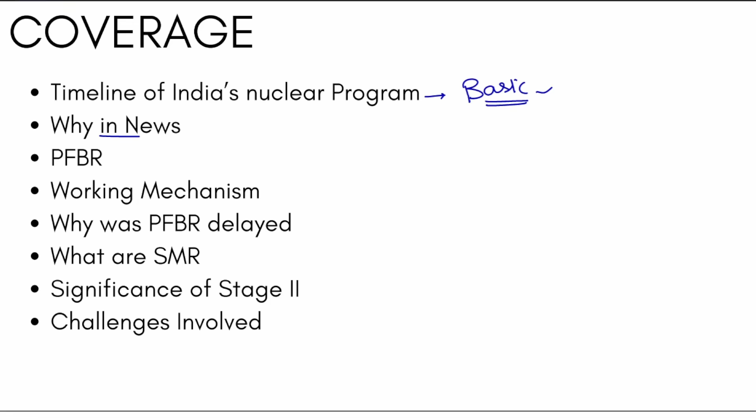So let's see a list of topics that we are going to cover. The first thing is the timeline of India's nuclear program from the very basics till now. Next, we'll focus on why is it in news now in 2024 and how is it important for our prelims? What can be asked? Furthermore, we'll see what are PFBR or prototype fast breeding reactors and what is the meaning of all these terms, fast breeding reactors and so on, how they differ from the pressurized heavy water reactors or the stage 1 reactors.

Next we see how do they work, the working mechanism of the PFBR and why was PFBR delayed till now. What happened in 1974 and 77? What happened in 2003? Which agreement was signed between India and US in 2005 and what is happening in 2024. What are the SMR, small modular reactors? We'll be talking about these also. What is the significance of the stage 2 for India and what are the challenges involved for the future development of India's nuclear program? All right, let's talk about this.

So in 1948, right after India's independence, India was very quick to hold on to the atomic energy development. The Atomic Energy Act was passed and the Department of Atomic Energy, that is DAE, was established. In 1954, a very renowned physicist, Dr. Homi Jahangir Bhabha, HJB, was made the first chairman of the DAE. So please remember, very, very important, first chairman of the DAE.

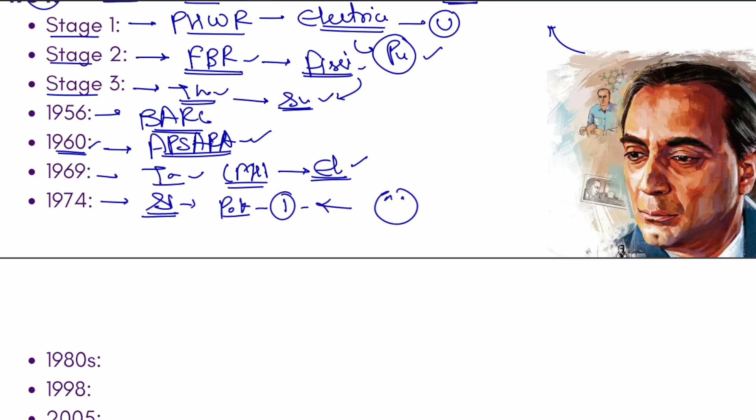In 1974, India conducts its first peaceful nuclear test, that is Smiling Buddha in Pokhran of Rajasthan, also known as Pokhran 1. This attracted sanctions from the West. They were not very happy with what India was doing in its backyard and implemented further sanctions. In the 1980s, India focused on the Indianization of the fuel. Uranium stopped coming from the West as well as from other countries, let's say France. This was critical for India's nuclear development, but it stopped coming. So India was not very happy with this.

So they had to use alternative fuels for the PHWRs. And in the 1980s, India focused on the Indianization of nuclear fuel cycle technologies and reactor designs. All right, in 1998, then what happens? Pokhran 2 was conducted. So India has shown the world that regardless of the sanctions and all, we are still strong and will not deter from our nuclear development program.

In 2005, India and US came to an agreement, also known as the 123 agreement, which paved the way for India's further development, and it ended most sanctions. In 2010, India continued to expand its nuclear power and refine its fast breeder reactor technology. We have been working on this FBR since 2003, and even earlier. All right, now let's talk about the present.

But first of all, let's have a look at India's current most important nuclear power plants. The first one is Rawatbhata in Rajasthan. This is near Kota, also very famous for the coaching centers. Then there is Narora in Uttar Pradesh, and Tarapur, the first one and the most famous. Then there is Kakrapar in Gujarat. And the one in news, that is Kalpakkam in Tamil Nadu. This is where the first PFBR core loading has happened. This is why it's in news.

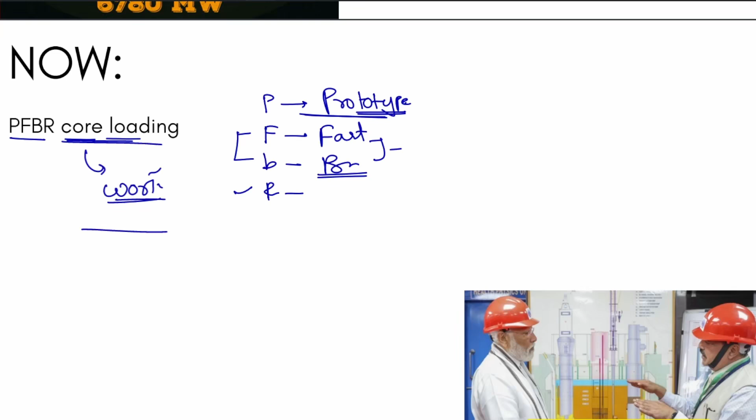Then there is F. F means fast. And B means breeder or breeding. And R means reactor. FB, we'll see later what happens to the neutrons, that's why it's known as fast breeding, and P is the first thing that has been developed. So this core loading has happened. Core loading basically means the fuel has been loaded into its core and it has started working, and this was witnessed by our Prime Minister Narendra Modi.

This marks the start of stage 2 of our nuclear development program, which was envisioned by Homi Jahangir Bhabha in 1954. After around 70 years, we are seeing this. So this has a closed fuel cycle. That means more nuclear fuel is not supposed to be supplied to this core. It uses the plutonium already produced by itself from different materials, from uranium oxide and a blanket material that we are not going to talk about right here.

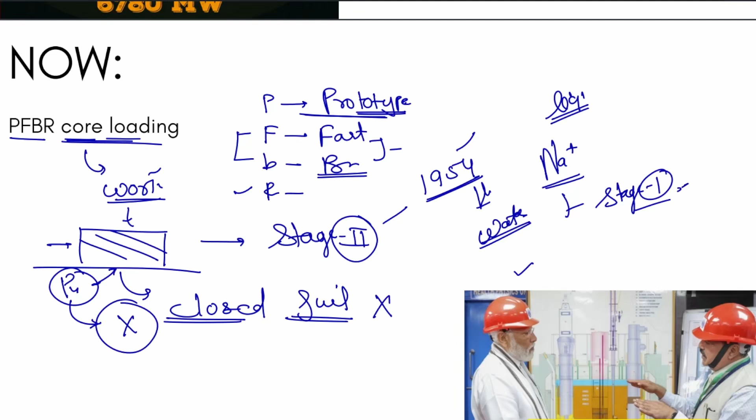Second, a unique feature of this PFBR is that it is cooled by liquid sodium, not by water or heavy water, unlike the stage 1 reactors. So it will help us in achieving self-reliance in the fuel supply for future fast reactors. This is a heavy water reactor, PHWR. So this is our stage 1 reactor.

So what we see here is the core of this reactor. These are the fuel assemblies. When we talk about the fuel assemblies, we essentially talk about uranium, so these are uranium rods here. These are the pressure channels which pressurize the water here. The neutrons react with this uranium and emit energy as well as various different things. Water is pressurized so that it does not boil. We'll talk about this as well.

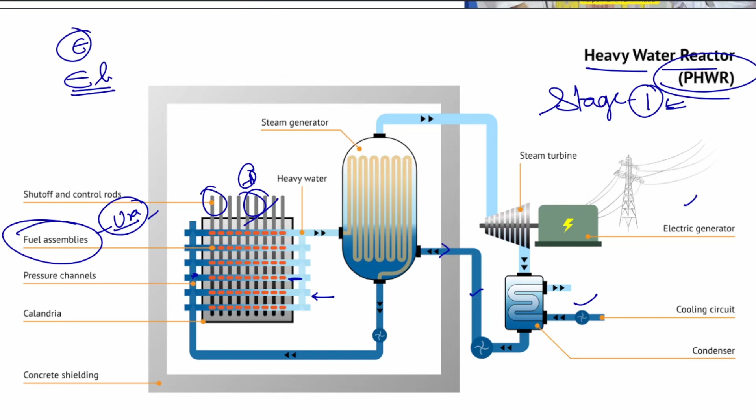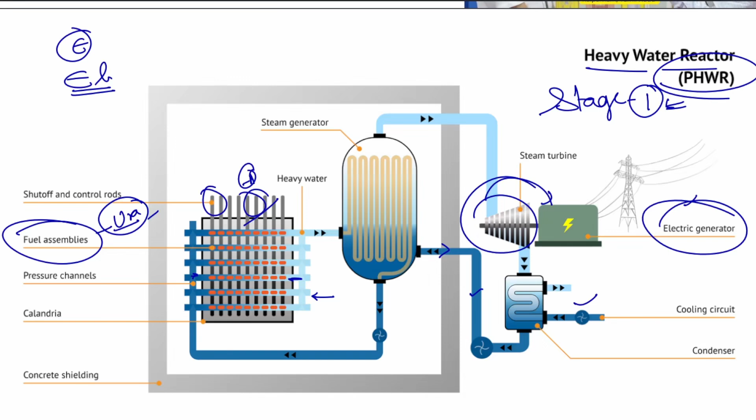This is the cooling circuit and electricity generator and so on. The energy that comes out heats this water, and this heated water moves a turbine here. This is the steam turbine, and electricity is generated. It basically works on the turbine method. So very simple. Next, we see the fuel that we are using.

I know it all looks a bit complicated, but we'll try to keep it as simple as possible. This is uranium 238, and this is the number of protons and neutrons it has in its nucleus. So basically we're learning about the structure of a simple atom.

It has some orbitals, and there we can find the electrons. Then it has a nucleus where we find the neutrons as well as the protons. The protons have a positive charge, neutrons have zero charge. This is why they are called neutrons, and electrons have a negative charge. The electrons have very small weight, but protons and neutrons have the same weight.

What happens when a nucleus is struck by an external neutron? It delivers some momentum to it. If the atom is unstable, then it will always break down into two counterparts. So this is what happens in a fission reaction. This releases energy, extra energy, and the opposite of this happens in a fusion reaction.

For a fusion reaction to take place, that means for different atoms to merge into each other, let's say deuterium and tritium, what we need is very high temperature and very high pressure. This often takes place at the core of the sun. We can observe this, and China is also making an artificial machine to do this. But we are not talking about fusion here. We are just talking about the fission reaction that is taking place in nuclear plants right now to produce electricity. The stage one nuclear reactions.

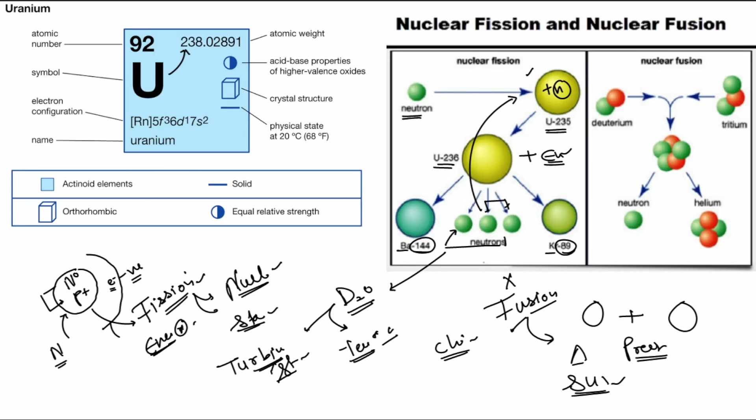So this can go on as a chain reaction if not controlled. This is why we use heavy water, D2O. This D2O slows down these neutrons, and D2O also absorbs the heat or energy that is produced, which is what drives the turbine via steam formation. Now let's talk about the pressurized part.

The water is pressurized because we do not want the water to boil. As we can see, the water is lying alongside the fuel rods, the uranium rods. A lot of energy is released here, and because this energy goes directly into water, the PHWR first stage reactors do not use direct steam. The steam is not directly produced by boiling because we do not want the water to boil inside the reactor itself. If the water starts boiling here, our reaction will not be completed, or it will go awry. It can lead to a disaster. We want the water to stay the same here.

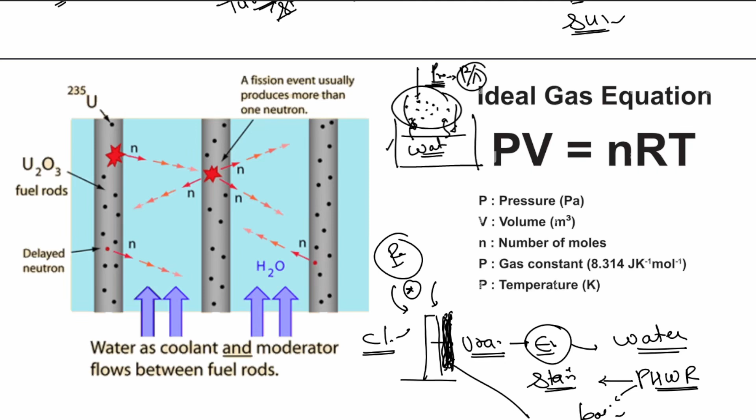So what we do is apply some external pressure. Let's say this is a container of water, and when we make it boil, it will change into water vapor, the gaseous phase. The distance between the water molecules will change; they will expand. So we apply some pressure, an external force. Pressure is equal to force upon area. We apply pressure here to keep them close and bound so that it does not boil. So now we have understood everything.

One more thing we need to understand is natural uranium. Natural uranium, whenever we get it as a fuel, has both parts, uranium 238 as well as uranium 235. We saw which one we used in the PHWR. In the PHWR, we use uranium 235 and it got consumed. So now we are left with uranium 238 as well as plutonium.

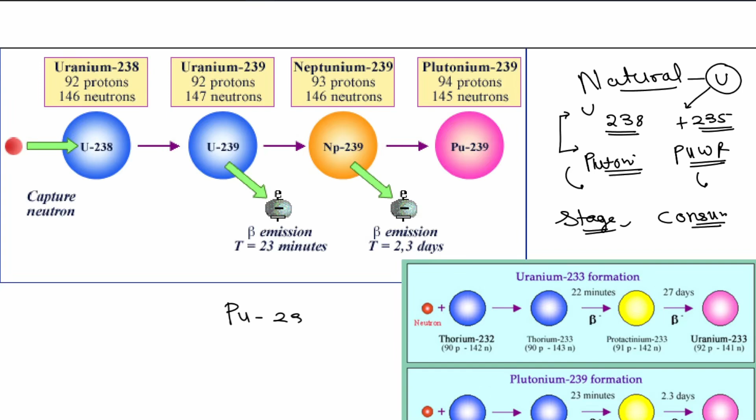Plutonium. So we must use these somewhere to do something or make us more energy somehow. This is the basic of our stage 2. In stage 2 we will be using Pu-239, that is plutonium 239, with uranium 238 in the PFBR. So we need a different reactor for this. That is our prototype fast breeder reactor, PFBR, to produce energy,

plus uranium 233. Again a new type, uranium 233, and more plutonium 239. Now as a basic premise, what we see is that this plutonium 239 can be used again in here. We will be needing uranium 238 to carry on the reaction. So it will be basically producing more plutonium than it consumes originally, and all of these are connected.

So for the establishment of this PFBR, the Indian government and the DAE set up a special purpose vehicle, or basically a research center. This is known as the Bharatiya Nabhikiya Vidyut Nigam Limited. Nabhikiya means nucleus, so relating to nucleus, to implement stage 2. This was established in the year 2003. So after 21 years, this technology has come into action.

Alright, in stage 3, what will we be doing? Plutonium 239, which we have here, will be combined with thorium 232, and this will produce uranium 233, which again we will use. Here's an infographic that tells us about the 3 stages and how they are connected to each other.

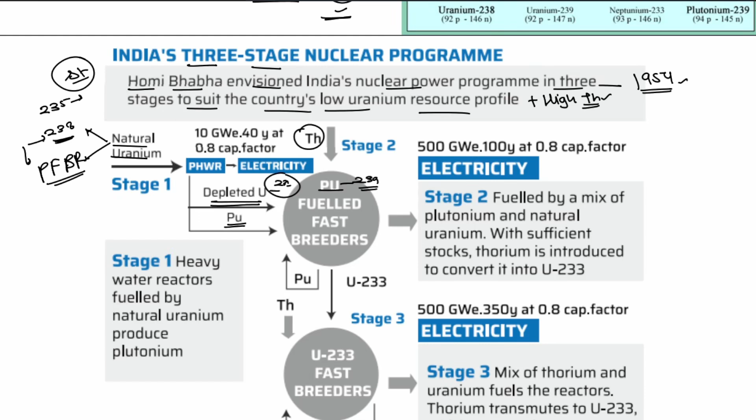Now we will introduce some thorium in stage 2 and use this plutonium 239 and the depleted uranium 238 in stage 2. So fueled by a mixture of plutonium and natural uranium, with sufficient stocks, thorium is introduced to convert it into U-233. So again some energy is released in stage 2 and we obtain U-233 further with the plutonium. The plutonium goes back into stage 2, and for this U-233 we'll have to develop another type of reactor, stage 3 reactors, that is U-233 fast breeder reactors.

We are not here yet. We are still working on it. So thorium will be introduced with this U-233 to produce more energy. A mix of thorium and uranium fuels the reactors. Thorium transmutes to U-233, which powers the reactors.

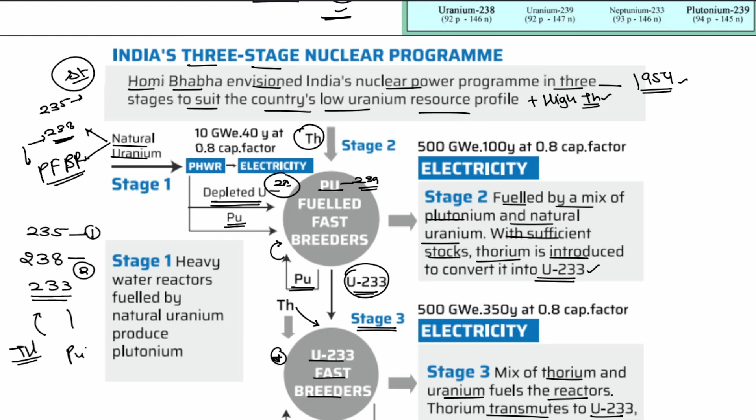So all in all it is an interplay, a game of uranium 238 and 235. 235 is used in stage 1. 238 is used in stage 2. And in stage 3 we will be using uranium 233. And what are the other components that will be used? Thorium, and plutonium 239. So this is the whole game that we are going to play in stage 2 and 3.

Now let's talk about why the PFBR was delayed. Why did it take us 21 years to reach here? And why did we start in 2003 instead of the 1970s? The simple answer is the West was not happy with our doings, that India in its backyard is bombing nuclear things. The PFBR, the prototype now in use at Kalpakkam in Tamil Nadu, was planned there earlier, in 1977.

But it was delayed by 26 years because of the sanctions that the West put on us. France was about to deliver us enriched uranium, but this was delayed and actually rejected, and we had to use mixed carbide fuel.

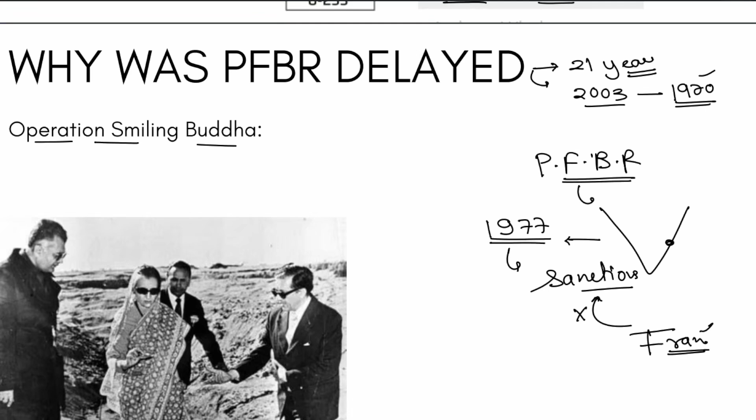Now let us talk about Operation Smiling Buddha as well. This was also known as Pokhran 1. Pokhran is a place in Rajasthan near Jaisalmer, in the Jaisalmer-Jodhpur circle. It's a desert type of place, so it's a very safe place to test nuclear bombs. India detonated a nuclear bomb here in 1974. This is known as the Pokhran Test 1 or Smiling Buddha mission.

This happened because of the 1962 Indo-Chinese War and Pakistan's ambition to develop a nuclear bomb around the same time. The West felt threatened by this and put sanctions on us. But in 2003, the PFBR started developing again. It got a green light from the West mostly.

But the issue was that most of the people who were working on the PFBR, after 23, 26 years, were all retired or nearing retirement. So the consensus, the teamwork, and the technology suffered; there was a brain drain, sort of. The brains were getting out.

Furthermore, what we see even after 2003, there were fund crunches. So this is what we are not going to discuss. It is like out of syllabus, but I have inculcated some points for you which are most important for the PFBR as per the prelims. All right, the simple portion. Although I have tried to explain very well about all the stages and the nuclear reactions, still, if you feel it's very complicated, you can just skip most of the things and talk about this.

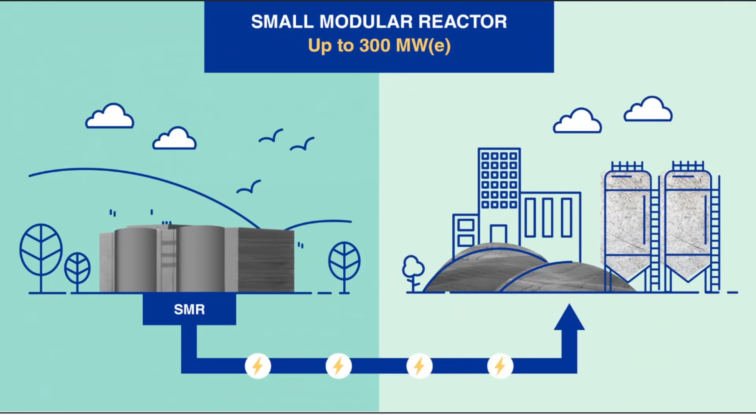Now let's come to the next part, that is the role of the SMR, small modular reactors. As I told you already, to go to stage 2, we need a stage 1. Now we cannot just put stage 1 reactors and stage 2 reactors very close. So we need to establish some stage 1 reactors near the stage 2 reactors, and these stage 1 reactors can be made into small modular reactors which have less power capacity and which can use uranium coming from the USA as per the 123 agreement. This 123 agreement was signed for the delivery of nuclear fuel from USA to India and many more countries, and this was signed in 2005, between Manmohan Singh and George Bush, I believe. Furthermore, these small modular reactors can come into private ownership, which India is heavily looking towards.

Now let's quickly talk about what is the value of stage 2 for India. The PFBR has a capacity of 500 megawatt electric. So that's a lot of energy. The DAE proposed building four more fast breeding reactors of 600 megawatt electric each, two in Kalpakkam in Tamil Nadu from 2021 and two from 2025 with sites to be selected.

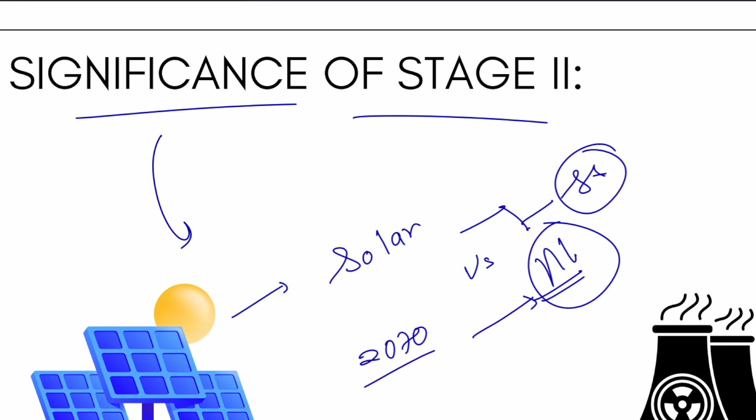All right. Second thing, we saw the significance in the last slide itself. Solar versus nuclear, just a simple debate. As we reach stage 2 and stage 3, it will become even cheaper, and we have to do this because of our net zero goals by 2070, 50, and 30. All right, so this you can read as a different topic.

Now let's talk about the challenges of the PFBR. What are the challenges these fast breeder reactors are facing? FBRs are harder to handle than other reactor designs because it's a completely different design. We have experience of the PHWR, pressurized heavy water reactors, but not PFBR right now. It uses a different coolant, different core material, and many other things are different.

Second thing, safety concerns are there. We do not have experience of handling it right now. In future we may have, and there have been disasters like the Fukushima disaster in the past, which give us an eye towards the safety concerns.

Further, the civilian nuclear program's nodal regulatory body is the AERB. Here we can see the AERB. It is basically under DAE, and DAE is under the government. So it's not a separate body. Multiple international bodies, even the International Atomic Energy Agency, IAEA, recommended the Indian government set up an independent statutory atomic regulator, instead of this, which is basically under the government by a few stages.

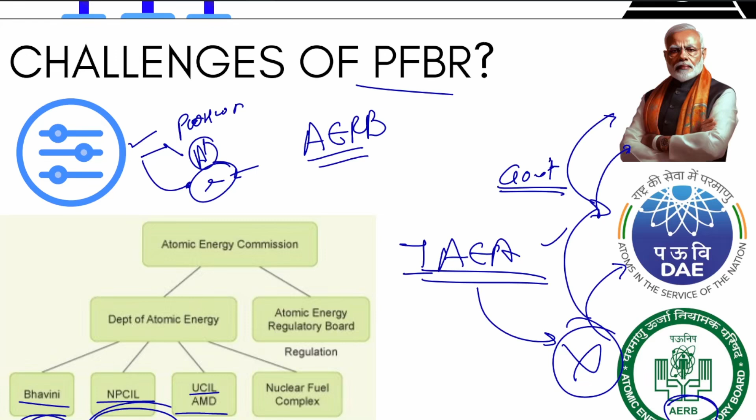We can see here BHAVINI, which is producing the FBR, then NPCIL, UCIL and AMD for uranium. A question came on this in the prelims. And the Atomic Energy Regulatory Board, AERB, which is under the DAE, which is under the Atomic Energy Commission, which is under the Government of India. So it's government owned. The regulator is also government owned, which is not liked by the IAEA.

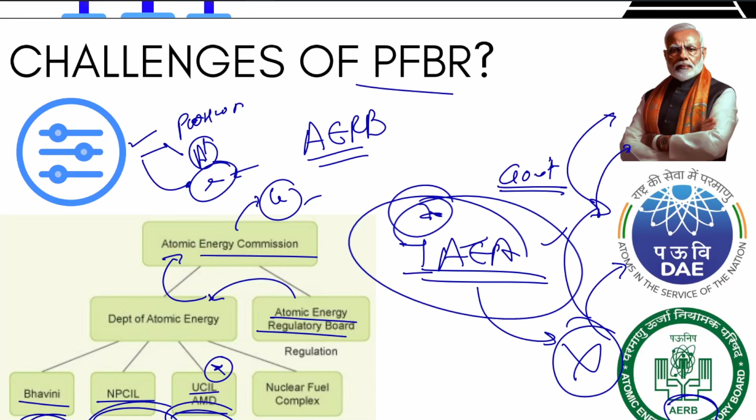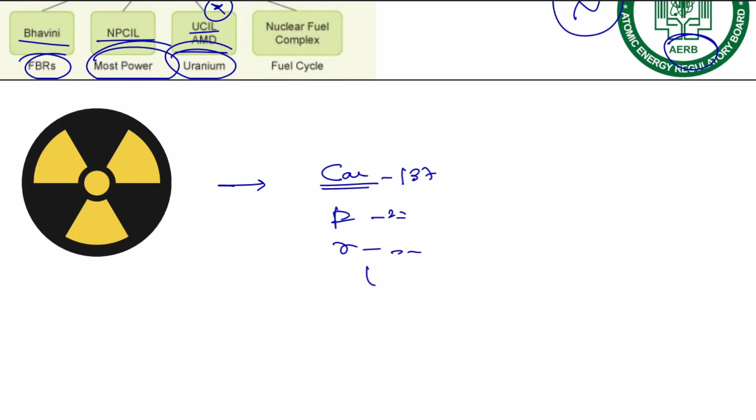All right, one more thing: these produce a lot of waste. The thorium cycle produces lots of waste, such as radioactive cesium-137. Then there is actinium-227. There is radium-224 and radium-228 also. These are all radioactive elements. This is all radioactive waste, the disposal of which is very hard.

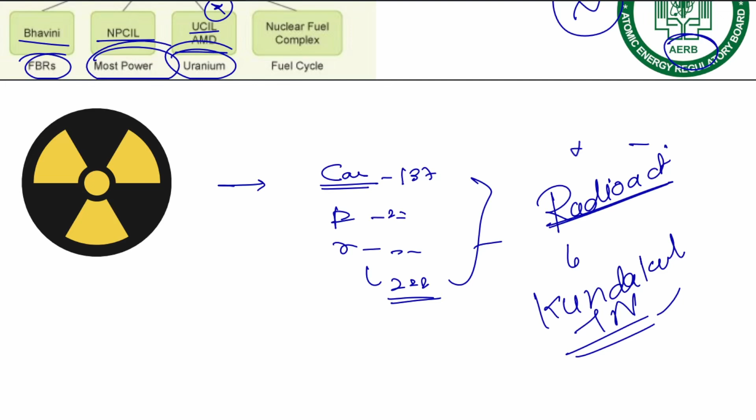This is the issue going on at the Kudankulam nuclear plant in Tamil Nadu. So disposal of this is really hard, and we must look at this concern also. You can read about radioactivity as a separate, very important topic. All right, so this is all about the PFBR and fast breeder reactors. So this is where we end our lecture.